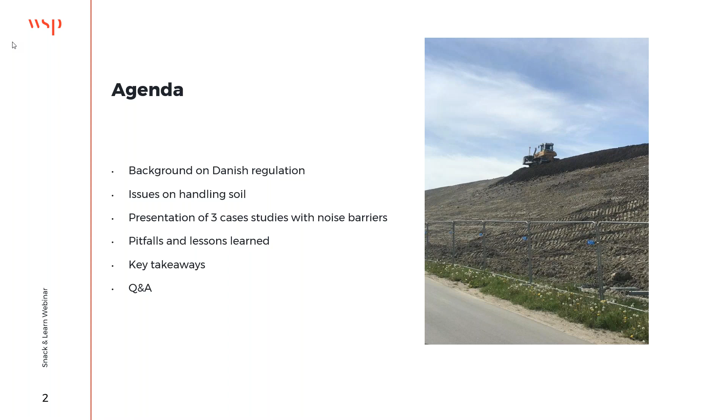According to the World Health Organization, WHO, traffic noise can cause discomfort and health effects such as communication difficulties, headaches, difficulty sleeping, stress, increased blood pressure, increased risk of heart diseases and hormonal influences. Also, the noise can lower children's performance, learning and motivation. Therefore, it's important to make an effort to lower the traffic noise.

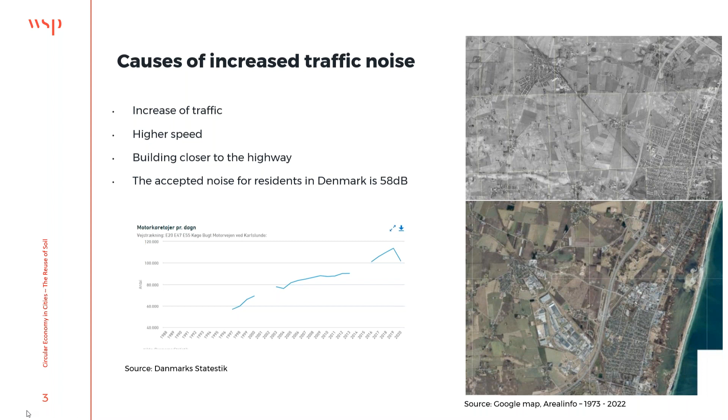Due to Danish regulation, it is possible to take money for receiving soil without paying charges if the project can support a public problem like traffic noise. Very often the developer or the municipality uses the money to give nature, activities and facilities back to the community. In Denmark, the soil must be considered non-polluted before entering the barrier, and you test the soil before it can go into the barrier.

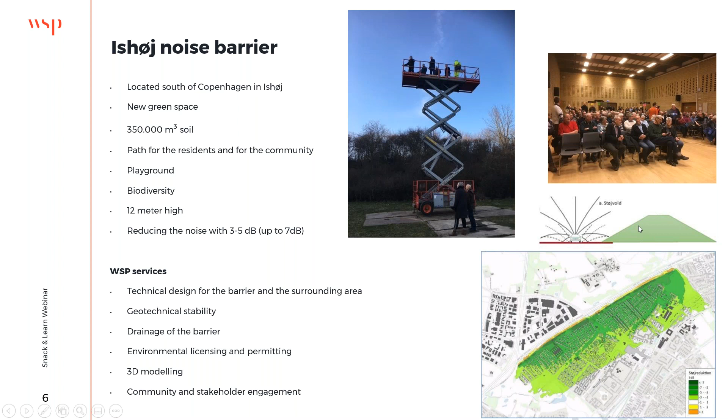The WSP services provided in this case were technical design for the barrier and surrounding area, the geotechnical stability, the drainage of the barrier, the environmental licensing and permitting, the 3D modeling, and the community and stakeholder engagement. And here you see the traffic, you see the noise going out, and it's bending against the noise barrier.

The circular economy aspect here was good because you reuse soil from other construction sites instead of raw materials. This is a picture of how it looked during construction.

This is WSP and the contractor planning how to make the temporary access road. It's very important to make the access road away from the residents, because every hour there will be about 50 to 60 vans going to and from the area to deliver the soil. If that is done directly past the residents, it will not be a very popular issue.

So in all cases, we have made the roads where the vans are going to and from away from the residents.

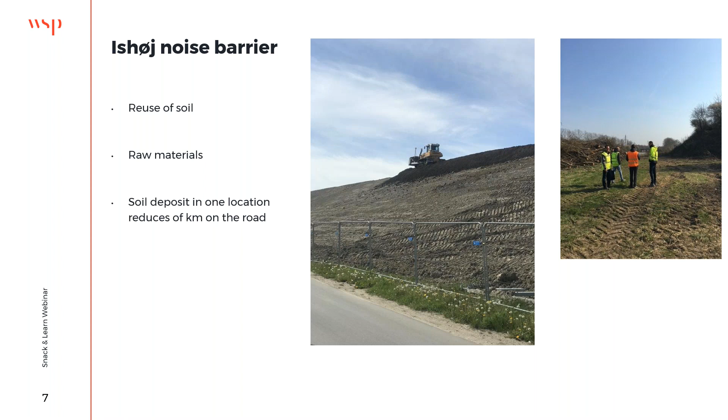It's also a better way to use the soil, because you take the construction soil. Normally you put it in a temporary place, and after that you put it in the final place. But here you take it directly from the construction site into this noise barrier. So it's a good way to reuse soil.

This is the part of the barrier that is finished. On the inside, it's filled with species that are native and blended, so there are many different kinds of species, and therefore high diversity.

There's no noise on the inside, and there are paths where you can go, and then you go on top, and just on the outside you can see the highway and the steep slope down to the highway. Here you can see the drainage of the barrier.

The landscaper had thought that we'd make a path on the outside, and we didn't think people would use it that much, but it's actually an experience to go and look at the cars and have this noise around your head, and then you feel isolated in another way.

The landscaper has made different kinds of nature on the barrier. Here there are trees, so it's kind of a forest. Here we have nutrition-poor soil, and therefore one kind of nature. And here there's more wet soil, and therefore another kind of nature.

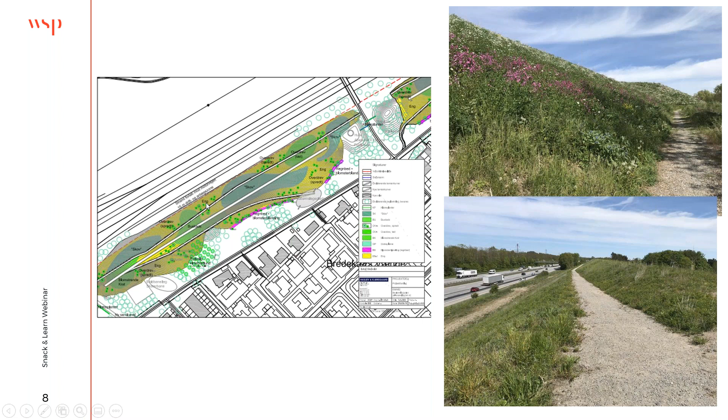The second case is Tværhøjgård, located south of Copenhagen in Greve. It's not built yet, but there's planned to be 350,000 cubic meters of soil deposited. The developer has planned a lot of activities for the residents. It's 20 meters high, and it's reducing the noise by 5 to 7 dB.

The developer and client is Casa Nord, and they are the owner and builder. The landscaper is Opland. The local planner is LE34, and the noise calculator is Sweco.

The services WSP have provided in this case are the technical design for the barrier and the surrounding area, the geotechnical stability, the drainage of the barrier, the environmental licensing and permitting, the 3D modeling, and the community and stakeholder engagement.

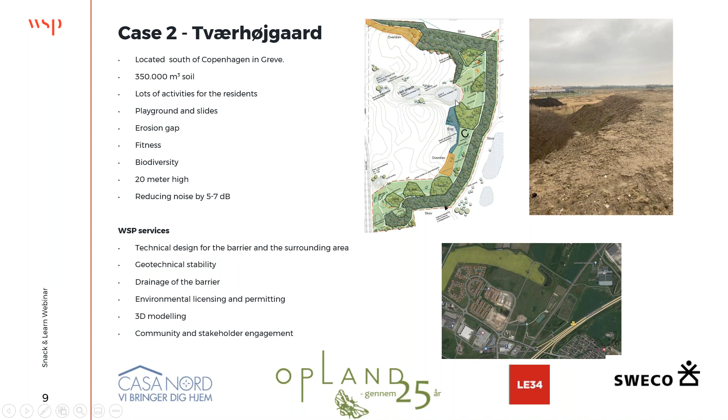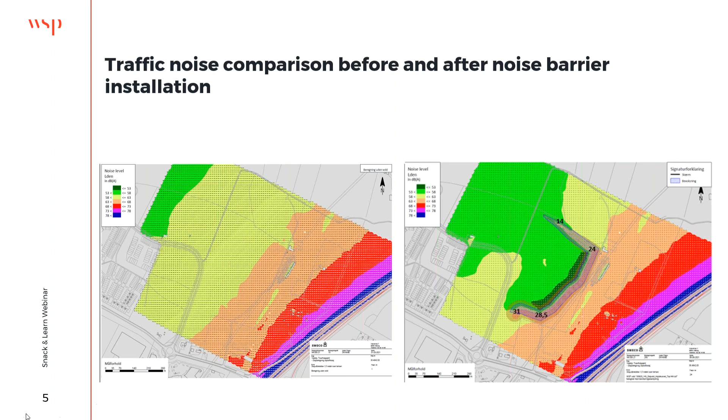It's 20 meters in height. Also, the erosion gap is a very nice area, both for the insects and the plants and for people to look at. It goes from the top to the bottom, and then the rainwater will go down. As you can see, there's all kinds of nature, open spaces, closed spaces, and trees in different heights. So the landscaper has really done a lot to increase the biodiversity.

And also you can see the fitness places for the community to use. This site should be open both for the residents and for the community.

The trees that are planned to be planted also allow the birds to make their nests. There will be different kinds of plants for the bees, so there will be a lot of pollen, and for the birds to have some food, there will be berry and fruit trees.

The seed mixture that is going to be used is collected from native species all over Denmark and then mixed, so we are sure to have a lot of diversity. Then you mix the soil, so sometimes you use nutrition-poor soil and sometimes you use topsoil, and then different kinds of plants will survive.

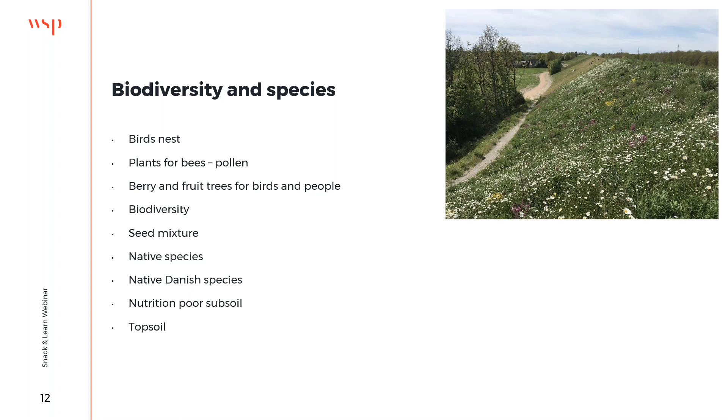In this case, there's also some protected nature. In these wet areas, smooth newt and great crested newt have been discovered.

In order to protect them, during the construction period we make a fence. That's so you make sure the newts don't go into the places where the construction machines and the soil are deposited, so they are getting peace behind the fence. And then the client, in this case, he has a plan.

He will make those wet areas better. This is not a very good area for newts currently, but he will make it more open and less steep, increasing the good nature for the newts.

When you have these wet areas, it's important that you don't cut off their way to wet areas in other places in the community. Therefore, we have done the drainage of the barrier as a wet alley around the barrier, so the newts can walk around and go over to the wet area.

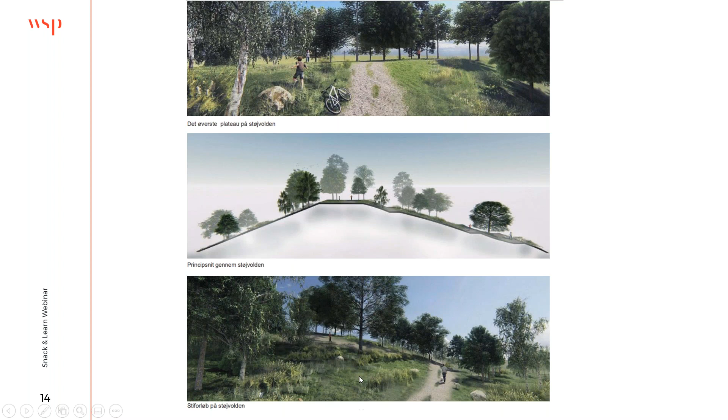The client is Høje Taastrup municipality, very near where the office of WSP is sited. The municipality has also done the landscaping themselves, and they have decided which plants to use and how to make the area look - that's something they have done themselves.

The services that WSP have provided in this case are the technical design for the barrier and the surrounding area, the geotechnical stability, the drainage of the barrier, the environmental licensing and permitting, the 3D modeling, and the community and stakeholder engagement we have participated in.

And the nature park is here, and then the highness of the barrier is out here. And this is the residence that is located here. And this is how the nature park looks. There's this big playground, and there's many bicycle paths and paths to walk the dog and play in this playground. So it's a really good area that is very used.